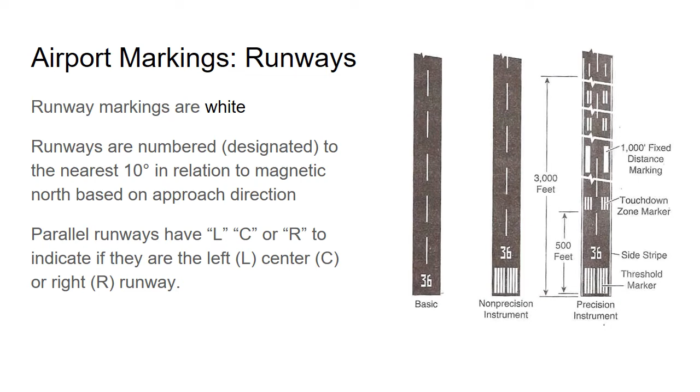We'll start with airport markings. Airport markings are required as part of the private pilot studies, but now you need to review and sharpen this knowledge. The basic information about runways becomes more important when you're orienting yourself on a rainy night. You will need to study all of Chapter 2 in the AIM in detail, because many of the details could make the difference as you struggle to find your way under IFR.

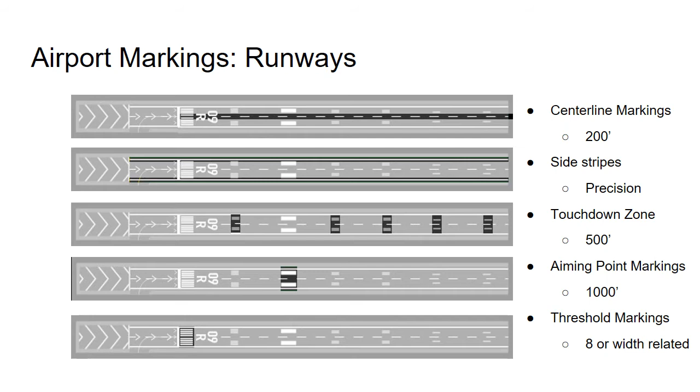You'll be responsible for identifying any or all of the runway features on this and the following slides. Many of these you should already know, but things like how many stripes are on the threshold marking are details you may not have needed as a private pilot. Knowing this allows you to gain some situational information quickly, though, in conditions where visual illusions are real risks. Here is a question for you. How many threshold stripes does runway 13 right, 31 left have at Hillsboro? Expect that to be on the pop quiz in our next class.

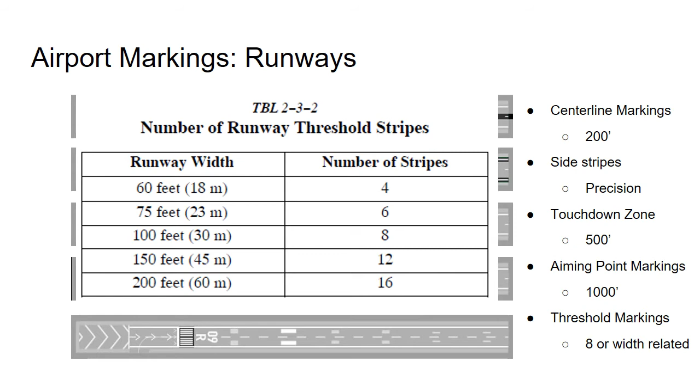Displaced thresholds come in two flavors. One like this that you can taxi on and off of, and blast pads where the aircraft should never be. Blast pads are marked with these chevrons. Sometimes you may see other arrangements of runway thresholds where there's a taxiway that actually goes out onto the runway pavement and is aligned with the runway. Remember, yellow paint means ground ops only. It's still a taxiway until you get to the white, and that means you can't take off on it.

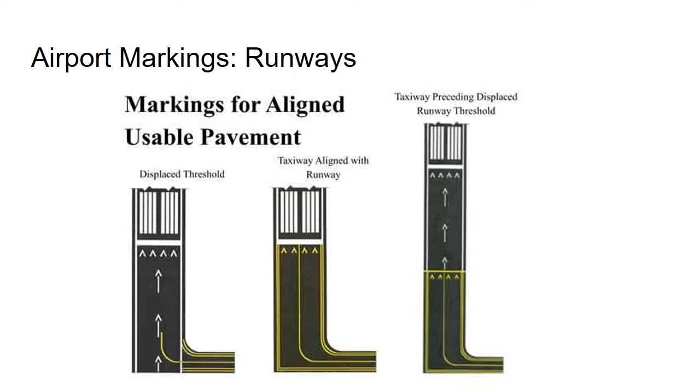Taxiway markings are yellow. The continuous lines show the boundaries of the taxiway, and dashed lines show aprons. There's a trend towards developing enhanced lines by painting a black background and sometimes adding enhancements to alert the pilot when they are approaching the hold short line.

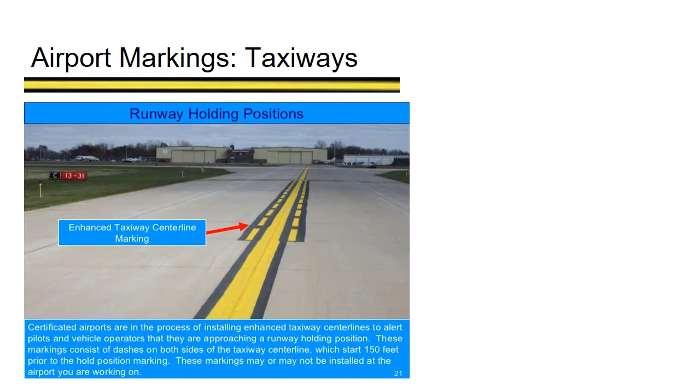It's important to understand the difference between a movement area, where you have to be in contact with ground control, and a non-movement area, where you don't. The terms are confusing, but remember they are from the perspective of the air traffic controller in this case. A movement area is where ground control is responsible for the movement of aircraft. A non-movement area is where they're not responsible for it. Keep in mind also that at bigger airports, non-movement areas may be controlled by somebody other than the FAA air traffic controller, such as a ramp agent. If that's the case, there'll be a frequency published for ramp control.

This is especially confusing at Hillsboro Airport because the non-movement portion of the ramp is huge. The movement area boundaries near HAA are actually here. There's a movement area boundary here and here. Everything on this side of the movement boundary is a non-movement area. That means that technically you could taxi from the Hillsboro ramp out to the run-up area without contacting Hillsboro ground. We have a letter of agreement between Hillsboro Aero Academy and the Hillsboro ground control that says we will call them up before we move out there, but it's not required.

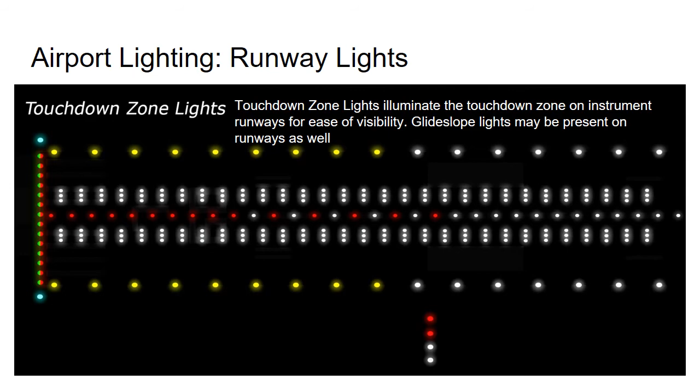When viewed from the landing threshold, the runway centerline lights are white until the last 3,000 feet of the runway. The white lights begin to alternate with the red for the next 2,000 feet, and for the last 1,000 feet of the runway, all the centerline lights are red. The yellow runway edge lights and the red runway centerline lights are there to help you know when you're running out of runway at night when it's hard to see the runway remaining signs. Some runways have additional lights in the touchdown zone to help you find the touchdown on the landing.

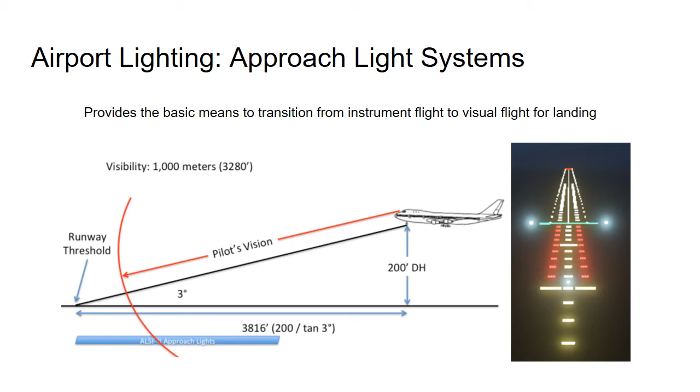Approach light systems help you see the runway environment just a little bit sooner in low visibility conditions so that you can start transitioning to visual cues from your instrument reference. There are a variety of them. You need to be familiar with their names so that you know what to expect when you break out.

If you don't know the difference and have been operating to an airport with MALSRs, for instance, then shot an approach to a runway with ALSF-1s, you might think you are closer to the end of the runway than you really are, which could lead you to reduce power for the landing prematurely. Many CFIIs require their students to be able to draw them from memory, but you should at least know their basic shape and size.

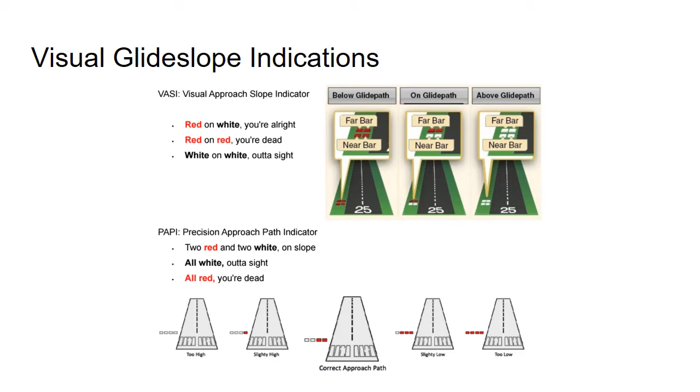PAPI and VASI have been around for a long time. The standard 3-degree glide slope that they are aligned to on a standard runway corresponds to typical instrument approaches. You should learn and discipline yourself to follow these in preparation for instrument flight. Don't forget your pilot-controlled lighting. Many pilots have flown approaches to uncontrolled fields at night only to go missed because they forgot to activate the lights and therefore couldn't see the runway.

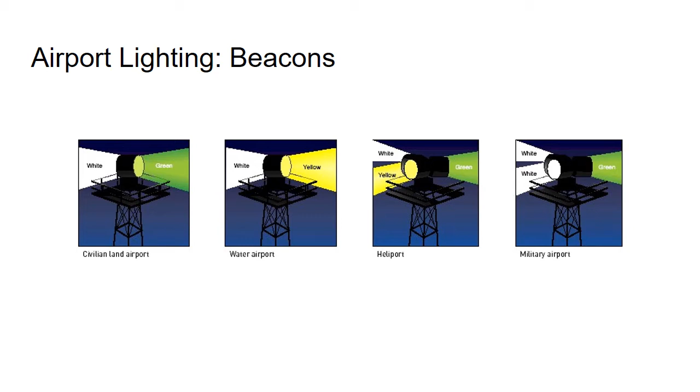There are times under IFR when you'll accept a visual approach or a contact approach, and it will be important to spot the airport. The beacon is usually the first thing you'll see, and it's important that you understand and be able to recognize the different types of beacons. Also be watchful for red lights, flashing or otherwise, near airports. They identify obstacles that might be a factor for you during a circling approach to land.

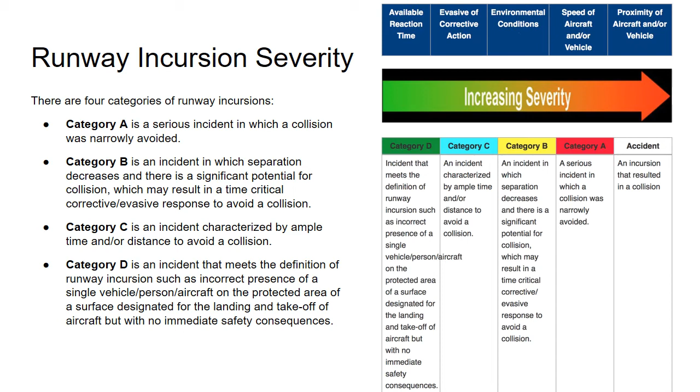Runway incursions continue to be an issue that the FAA is focused on. An incursion can happen in movement areas, in which case they are a surface incursion, or a runway, in which case they're a runway incursion. They come in 4 levels of severity, starting with D as the least hazardous, and rising to A, which means an accident was narrowly avoided.

You can avoid most of these incursions by having your airport diagram out and using it. The newest diagrams include the hotspots as well as other useful information. Use your heading indicator in conjunction with signs, markings, and other tools to stay oriented. Maintain a sterile cockpit during all taxi operations and focus on the task. If you're unsure what to do, stop and ask.

Now let's talk about airspace from an IFR perspective. As an instrument pilot, we have 2 concerns relating to airspace. Number 1 is if we ask for a clearance into an area, are we likely to get it? And 2, what sort of VFR traffic activity can we expect to be there, and how close to the clouds are they going to be flying? There's nothing new here in terms of the names and the rules for the different classes of airspace. It's just that you're using the airspace differently.

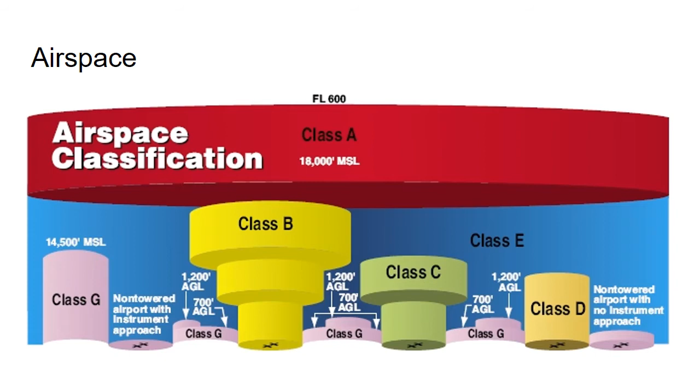Controlled and uncontrolled airspace does not refer to whether communications are required. It has more to do with how we separate aircraft. These terms go way back to a time when airspace was uncontrolled all over. There were few airplanes, none of which had the instruments necessary to fly in the clouds. Traffic density even at the busiest airports was very low, and the airplanes flew very slowly.

Although there were no standards for weather conditions the aircraft could fly in, it was generally agreed that as long as you remained clear of the clouds and had at least 1 mile visibility, you could see other airplanes and terrain in order to avoid a collision. This was called see and avoid, and it formed the basis for VFR flight and remains critical to preventing collisions.

With the advent of gyroscopic flight instruments, travel through the clouds became possible. See and avoid was useless in the soup, so procedures to ensure aircraft separation were needed. This led to the creation of air traffic control, or ATC, and controlled airspace, what is now called Class E airspace. The government established a system of airways, each 8 nautical miles wide with base altitudes of 1,200 feet above ground level, and designated the airspace within them as controlled airspace. The airway system was defined by a network of radio beacons, many of which were located on airports.

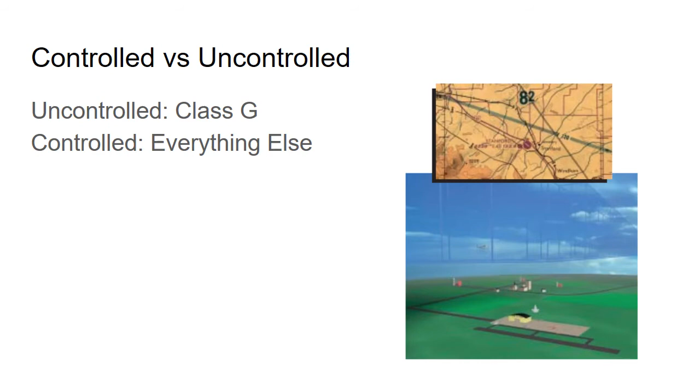When weather conditions were good, pilots could still fly on IFR flight plans if they chose, but were responsible to see and avoid other aircraft. This is still true for us in most cases. Some parcels of airspace contained many airways, so in those areas, controlled airspace was established at 1200 AGL to coincide with the airways, whether on an airway or not. When VOR airways arrived in the 50s, they were and still are known as Victor airways.

Controlled airspace does not mean that all flight within it is controlled. It means that IFR services are available to qualified pilots who choose to use them. Pilots operating under VFR may fly freely in controlled airspace as long as the weather meets certain minimums that apply to that airspace.

Airport-based radio navigation facilities made instrument approaches possible, greatly improving the utility of aircraft and also creating some traffic separation challenges. Close encounters between IFR airplanes on approach and VFR airplanes flying under the weather led to creation of transition areas. Transition areas surrounded airports with instrument approaches and brought the Class E airspace down to within 700 feet of the surface. This move was intended to protect IFR pilots. Pilots flying under VFR could operate in the transition areas as long as they had VFR weather. These are still there, marked by the fuzzy magenta bands on the sectional.

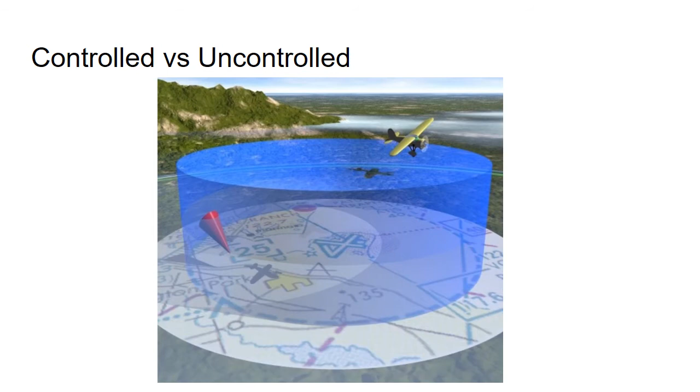Class G is uncontrolled airspace. It can extend from the surface to a maximum of 14,500 MSL. Everything above that is controlled airspace. You have to look a long ways out in the boonies to find Class G airspace that extends all the way up to 14,500 nowadays. In most cases, Class G only extends up to 1200 or 700 AGL. Max speed is 250 knots below 10,000 feet. An instrument-rated pilot can fly IMC in uncontrolled airspace, but they will not receive ATC clearances for it.

Class G that extends up to 14,500 is depicted in brown on the IFR low en route charts, such as this one. As I prepped this video, I decided to check for nearby Class G airspace on our chart. Though there's a little in Canada just across the border, you have to go east all the way to Duluth to find it at our latitude in the US.

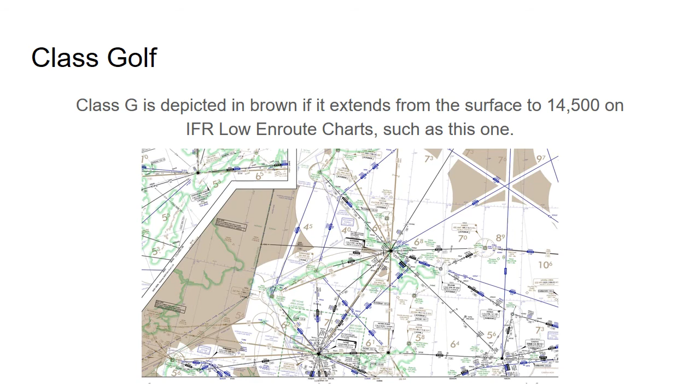There was a lot more just 20 years ago, but with the move towards RNAV, where pilots can cut across country off airway, it made sense to get rid of most of it. There is, of course, still Class G low to the ground, again topping out at either 700 or 1200 AGL, unless the Class E goes all the way to the surface around an airport with an instrument approach.

You do still need to know that, unless designated at a lower altitude, as is usually the case, Class E begins at 14,500 feet, as well as the airspace overlying the waters within 12 nautical miles of the coast, and it goes up to, but not including, 18,000 MSL, at which point Class A starts. There is also Class E above flight level 600, though it's unlikely you're going to have to worry about that unless you're wearing a spacesuit. Max speed is 250 knots below 10,000 MSL.

It's worth noting that Class D is not depicted on the en route chart, and Class C and B are only depicted as a big shape with none of the sector information. That's because if you're IFR, you're already on a clearance and talking to somebody, so you shouldn't have to worry about it most of the time.

The one common exception to having to worry about it is when switching to tower from approach. If approach forgets about you and you're about to cross into the Class D airspace, you need to ask and switch. Most towers don't care if you're a little late, but some do. Aurora Tower, for instance, has reported a number of pilots recently because Portland Approach didn't hand them off in time. We've talked to Portland Approach about this, and they say they don't have a problem with you switching to Aurora Tower without asking if the frequency is too busy.

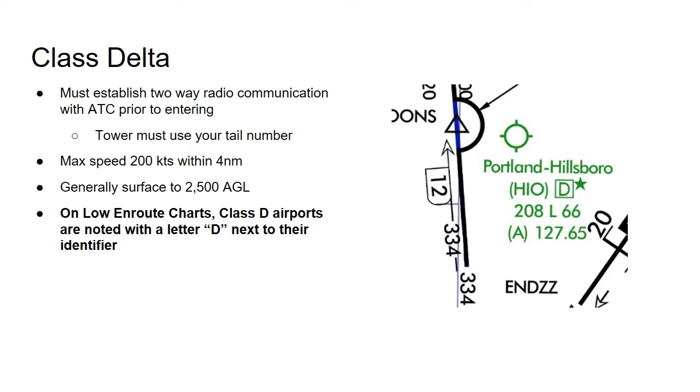In Class Delta airspace, you have to establish two-way radio communication with ATC prior to entering. That means that you must have called them and the tower has to have responded with your tail number. Max speed in the Class Delta airspace is 200 knots within 4 nautical miles of the airport. Generally, they go from the surface to 2500 AGL. On low en route charts, Class D airports are denoted by putting a letter D in a box next to the airport identifier. Class D weather minimums are the same as Class E below 10,000: 3 statute miles, 500 below, 1,000 above, 2,000 to the side.

With Class Charlie, the inner ring of Class Charlie airspace extends from the surface to 4,000 and has a radius of about 5 nautical miles. The outer ring typically extends from 1,200 above the airport to 4,000 above the airport and has a radius of about 10 miles. The shapes may vary, and the general overall shape is depicted by a blue shaded area on the low en route chart, but they won't have the sector details that you're used to seeing.

Two-way communications is needed to enter, and you have to have a transponder with altitude encoding in order to be either within the Class C or above it. Max speed is 200 knots within 4 nautical miles of the airport. Class C weather minimums are pretty much the same as everywhere else, so 500 below, 1,000 above, 2,000 to the side, and 3 miles visibility.

Once you've got your instrument rating, Class B isn't so scary anymore because you're already talking to them and you'll fit right in with the other operations a lot better. The communications might be a little bit faster paced, but you're playing the game the way they want it to be played as an IFR pilot. Because everybody is on a clearance in Class B airspace, we don't have to worry about separation as much. The air traffic controllers have the obligation to separate all the aircraft. So VFR traffic just has to remain clear of the clouds.

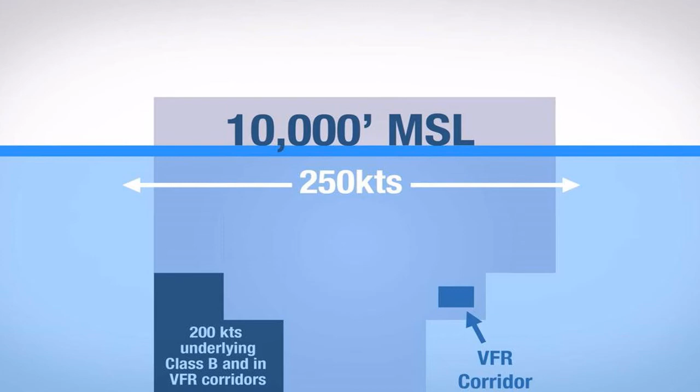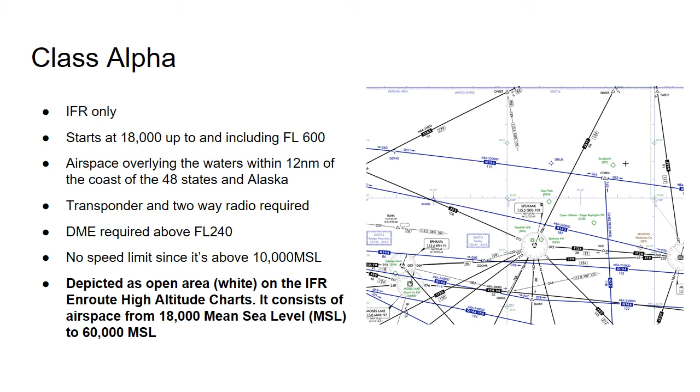Inside the Class B, we can go faster if we're in a faster airplane. We can go 250 knots. Class A starts at 18,000 and again goes up to flight level 600. Everybody in Class A has to be on IFR. DME is also required above flight level 240, and you can go as fast as you want up there, as long as you stay under the speed of sound, at least for now.

There may be times when special VFR comes in handy as an instrument pilot, and once you're instrument rated, you can use it even at night. Special VFR can be requested anytime you're in controlled airspace below 10,000 feet. It must be pilot requested. ATC will never offer this unless you ask. I've heard many radio conversations where pilots were trying to get into the Class Delta airspace and were apparently waiting for the tower to offer special VFR. But since they didn't ask, they didn't get it, and therefore they couldn't enter the Class Delta airspace.

Under special VFR, you need to remain clear of clouds and maintain flight visibility of at least 1 statute mile. You also need to hold a private pilot certificate, and you can only operate special VFR between sunrise and sunset. A current instrument rating and an instrument-equipped aircraft allow you to get special VFR after sunset. Remember though that under these weather conditions the tower can only let 1 aircraft in at a time unless they have one in sight, so don't bank on getting a special clearance. If there's somebody on the approach, then you'll have to wait.

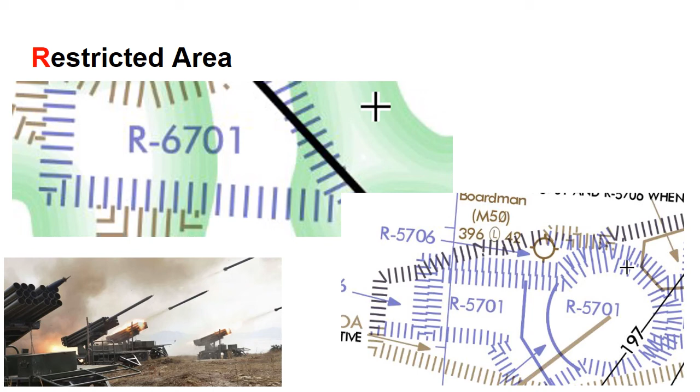Restricted areas are areas where operations are hazardous to non-participating airplanes and contain airspace within which the flight of the aircraft, while not wholly prohibited, is subject to restrictions. Activities within these areas must be confined because of their nature or limitations that may be imposed on aircraft operations that are not part of those activities. The restricted areas denote the existence of an unusual, perhaps invisible hazard. Penetration of restricted areas without authorization from the using agency may be extremely hazardous.

Warning areas are similar to restricted areas. However, they're in areas where the United States government does not have sole jurisdiction over the area. This is typically out over the water, and that extends from 3 nautical miles outward from the coast of the United States, and it may contain activities that are hazardous to non-participating aircraft.

National security areas consist of airspace defined by vertical and lateral dimensions, established at locations where there's a requirement for increased security. Pilots are requested to voluntarily avoid flying through depicted NSAs. When necessary, to provide a greater level of security, flights in NSAs may be temporarily prohibited.